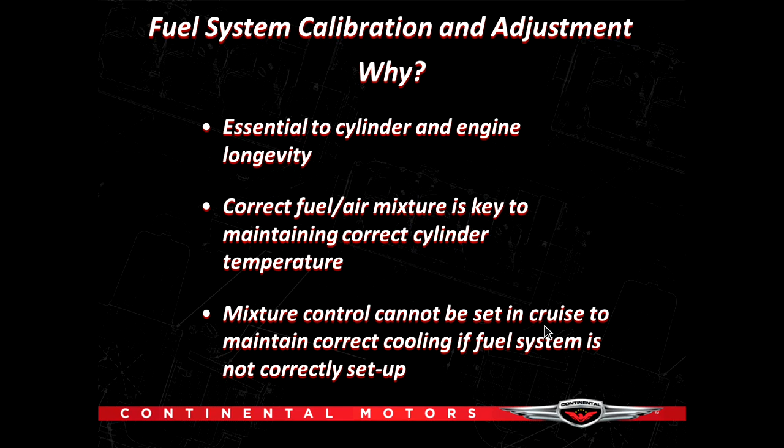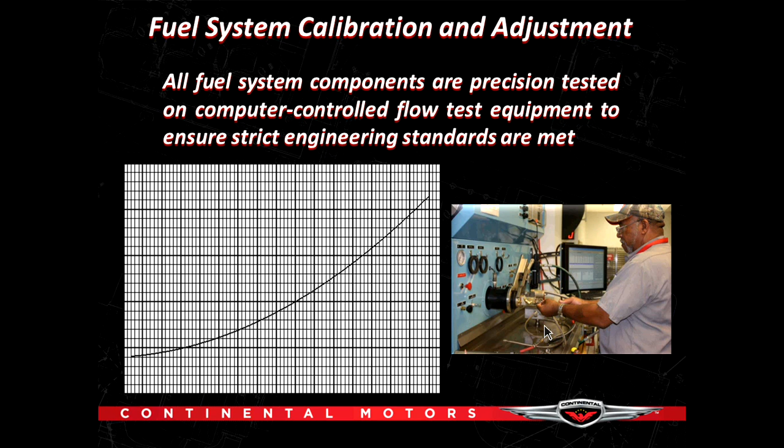Fuel system calibration. Now, during the webinar tonight, you'll hear me reference continentalmotors.aero and talk about our website. All of these documents I refer to in service bulletins and service information directives, you can find free of charge at our website, continentalmotors.aero. So don't feel like you have to write everything down. Fuel system calibration can be found in the latest revision of Service Information Directive, what we call SID.

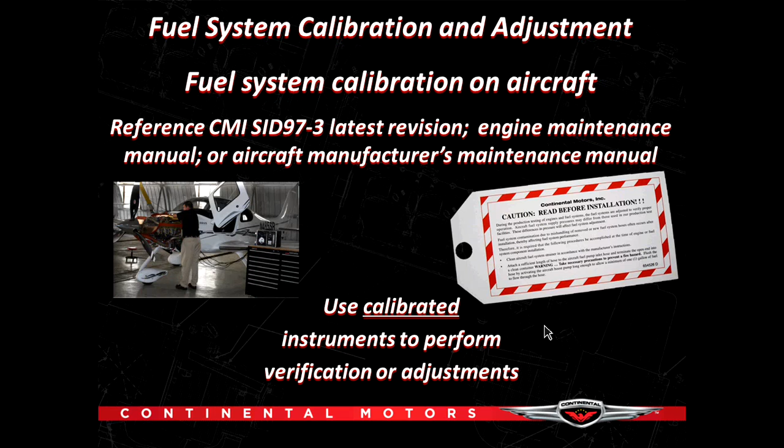There's a lot of people out there in aviation books and periodicals that tell you that you shouldn't clean your nozzles. Continental doesn't know what they're talking about, they say. Well, we believe that we do. We believe that it is necessary for you to clean the nozzles.

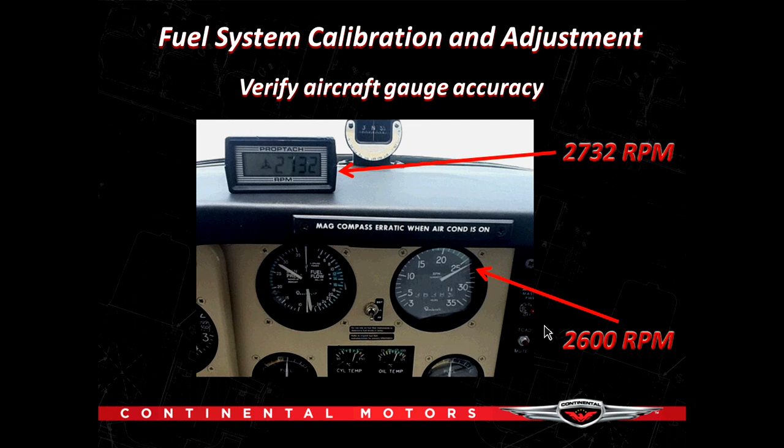I do agree with Mike Bush on one point, and I can say Mike Bush, folks, because he's a friend of mine, and he knows that I pick on him all the time. But Mike Bush says, oh, you don't need to clean your nozzles, there's fluid going through them all the time.

If you've ever looked at an aircraft engine after a period of time, it can get very dirty, dusty, and greasy. And if those screens become clogged, you may not be getting the performance that you need. You could be having elevated cylinder temperatures or lack of performance.

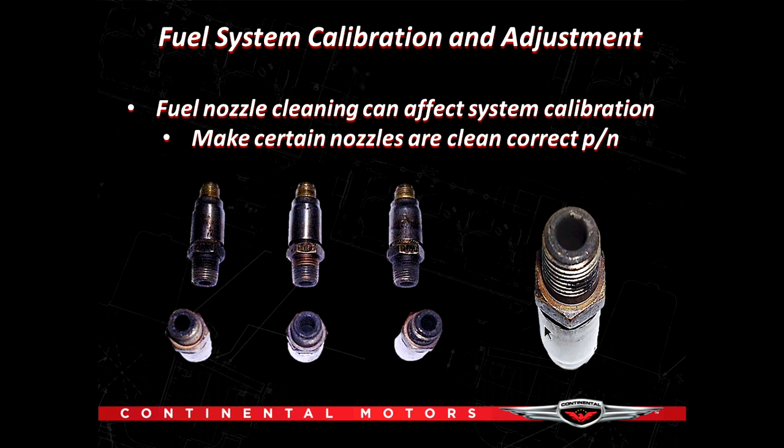Again, where do I obtain the information? Review with your mechanic, SID 97-3, or the latest revision of the Bonanza service manual. If you go to your mechanic and he's never heard of 97-3, or he says that Bill Ross doesn't know what he's talking about, then I would suggest you have a couple of choices.

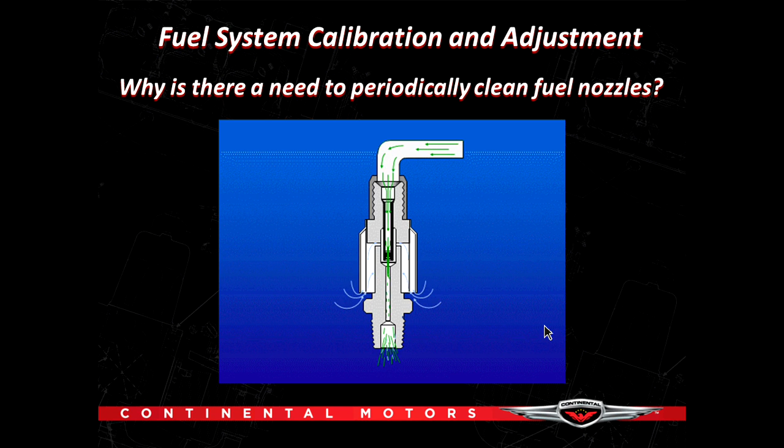One is you can find another mechanic, or if he is your brother-in-law or something like that, in the interest of family harmony, if you want to keep him as your mechanic, then you need to call us here at Continental, and we need to educate him through our school, and we'll be glad to do that. In fact, you as the aircraft owner can come with the maintenance provider, with the mechanic, and we often refer to that as couples therapy.

So make sure that you review that SID 97-3 with your mechanic if you fly fuel-injected Continental. If he doesn't know about that, and he doesn't have the gauges, and he thinks that's not necessary, you need to get in touch with us, and we need to educate your mechanic and get him on board with us.

Very important. Let's talk about oil change requirements and what we can learn from an oil change. A couple of questions you really ought to ask: did you cut my filter and examine it? You need to be looking for particulate in the filter. Has there been any change from the last inspection? And did you make a mess of my engine?

Do you or your maintenance provider punch holes in a filter before removal? Many of you may do that. I know it's becoming a chronic problem because people - it's tight spaces, and we don't want to make a mess. If you're doing that, I'm asking you tonight to please stop, and here's why.

We have worked on many engines in our analytical department where people are poking holes in the filter, and they jam a screwdriver through the filter. It contacts the filter media, it goes into the inlet of the pump, it's sucked into a small passage, and there have been catastrophic engine failures as a result of that because it starves the connecting rod for oil.

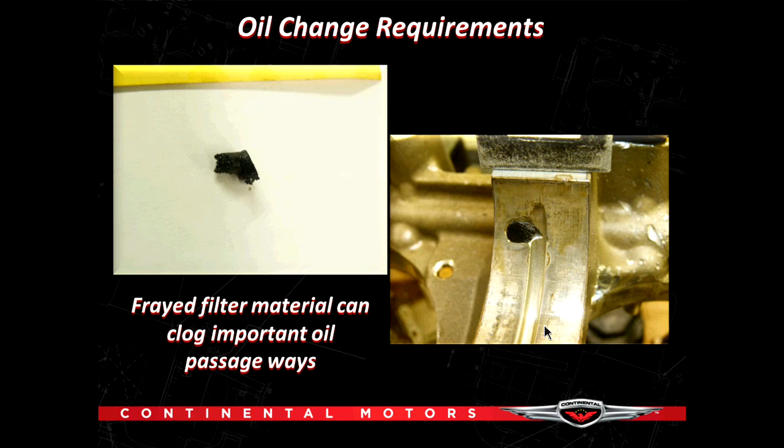In my airplane, I keep a chart of what point in time, what hour, I added a quart of oil. Limited oil consumption is normal. I'm asked all the time, what is about normal? I'd say about average is a quart in 7 hours. What's the maximum? There's a formula based on percent horsepower we can calculate, but what it breaks down to is about a quart an hour.

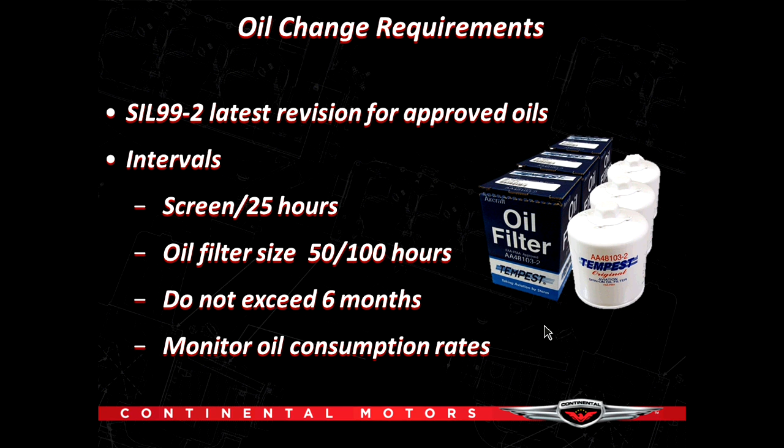Or if you have to stop for oil before you stop for fuel, you're definitely beyond maximum brake-specific oil consumption. But a little oil consumption is good by nature, and the tolerances in an air-cooled engine mean they will burn a little oil. It ensures proper lubrication of the cylinder walls and things like that. Oil consumption can vary from one engine to another based upon its time, its use, and percent power and operating conditions.

Oil filter inspection—you should be looking at that every time. Look at the filter and see what particulate is there. It is normal to have a little material in there. You certainly don't want to be reading part numbers. If you start to see part numbers, you definitely need to ground the airplane.

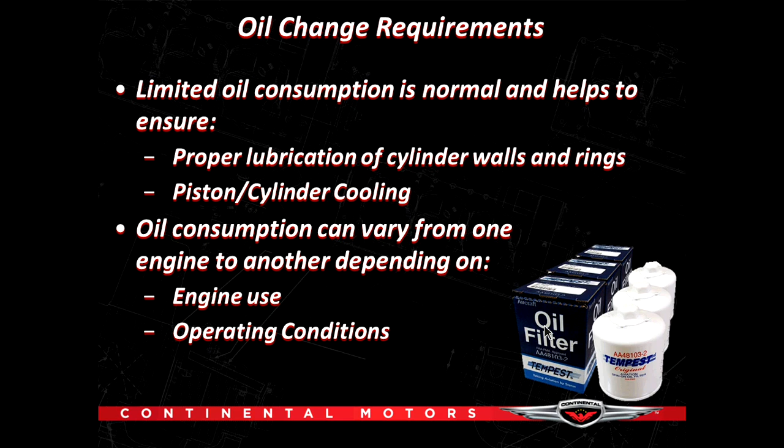If you do find some abnormal wear, a more detailed inspection of what the constituents are in the filter would be required. One way we do that is wash that material into a Petri dish. That dirty plastic container may look dirty, but if you look close at the slide, there's a clean Petri dish in the bottom there, and the technician is washing that filter with a bottle of aviation gasoline, squirting it as a spray and washing those constituents into the Petri dish so he can look at it under magnification. And our safety man is nowhere to be seen with that activity going on.

Then we put it under magnification, and we can find lots of different things just by looking at that—we can see Scotch-Brite, aluminum, dirt. Dirt is indicative of the induction system: do I have an alternate air door rigged improperly, and things like that. We can tell a lot just from the magnification.

If you have an abnormal filter, you can send it to Continental Motors, and we will look at it free of charge, whether your engine's currently under warranty or not. Just call us at the toll-free number and we'll send you the paperwork to send it in. There's no charge for it. We'll look at those constituents, wash your filter into a clean Petri dish, and examine that. If your engine's on oil analysis, you need to stick with the same oil analysis company at the same regularly scheduled interval and look for spikes or relative changes over time.

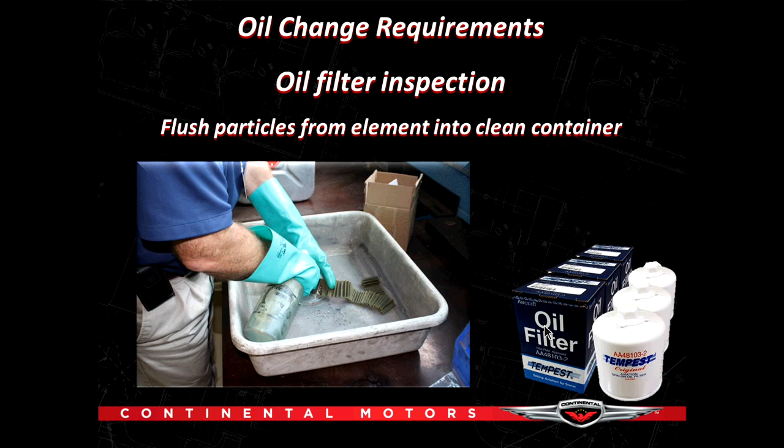If you do see an increasing trend, then we need to be very thorough in our inspection of the filter contents as we go along.

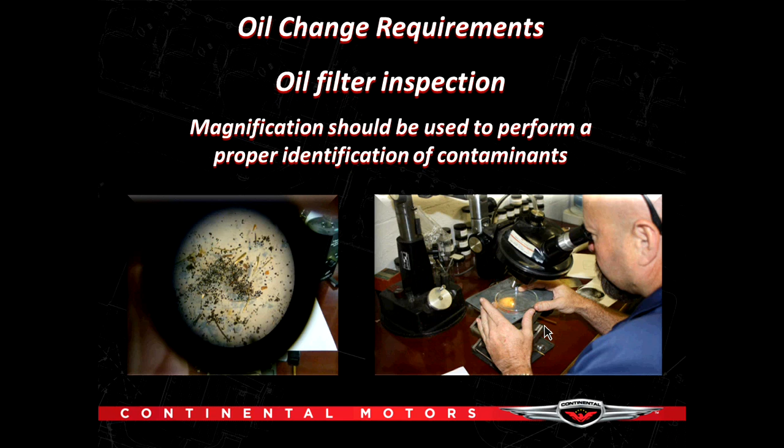Okay, cylinder compression tests. I guess we're running okay on time, but I'm going to talk about cylinder compression tests and probably change some of the ways you're thinking. First of all, should I be concerned if my compression drops below 60? Did you perform a borescope inspection? And did you perform the compression test in accordance with Service Bulletin 03-3? Believe it or not, there are a lot of people out there that do not adhere to Continental's bulletin on performing the compression test.

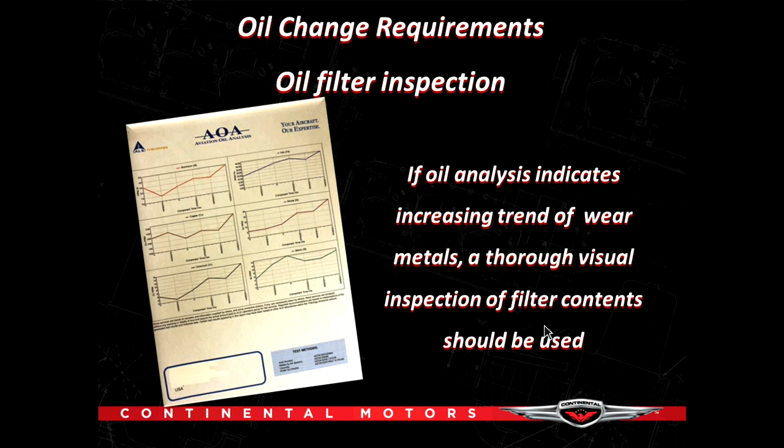Let's talk about the compression test and what it means. In my opinion, the compression test is an absolute bogus test. It doesn't tell us anything about internal engine health. It doesn't tell us about performance. It doesn't really tell us about wear, because it's not representative of what's happening in the engine under the dynamics of combustion. We're putting 80 pounds of air in the cylinder and reading a differential pressure, and that really has nothing to do with horsepower or anything like that. It is a bogus test.

There are some better tests I'm going to talk about in a minute, but the purpose of performing the test is to find the leak source, and that's really all the compression test tells us—is it leaking from the exhaust system, through the intake, or out of the breather? If it's the exhaust, it's coming from the exhaust valve. If you hear it in the intake, it's the intake valve, and if you hear it in the breather, it's blow-by past the rings.

The procedure for performing the compression check is contained in the latest revision of Service Bulletin 03-3. To do that, you have to understand the function of the master orifice tool, and whether 60/80 is the real standard. That's very important, folks.

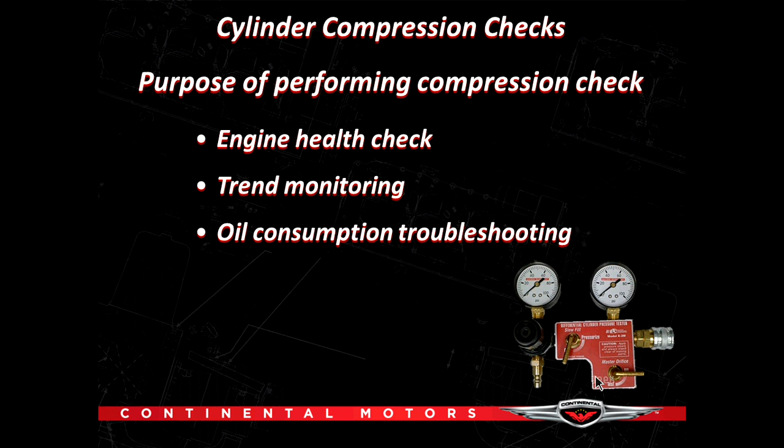60 over 80, everybody thinks, oh my gosh, the compression's 59, 58, the world is ending, and I've got unscheduled maintenance. That's simply not true. Years ago at Continental Motors Engineering, we ran engines with falling compressions on dynamometers to see how low the compression would have to be before you could measure an infinitesimal change of horsepower. Believe it or not, the compressions are very, very low before you can detect a small change. We referenced that area of compression and that's how we came up with a master orifice tool.

That's a calibrated leak, and your mechanic must establish that leak limit prior to the test using a master orifice tool. He sets 80 pounds of air on the gauge, flows it through the master orifice tool, and reads the leak limit on the other side. Then he's done with the master orifice tool and can perform the compression test. My compression tester, if I checked it, usually reads somewhere between 40 and 42. If the leak limit is 40 and I get a compression of 40 and your engine borescope is fine, I will return that engine to service.

The borescope inspection is much more indicative of what's going on in the engine than the compression test. Let me go back one slide here. The 60 over 80, I want to explain where that 60 came from.

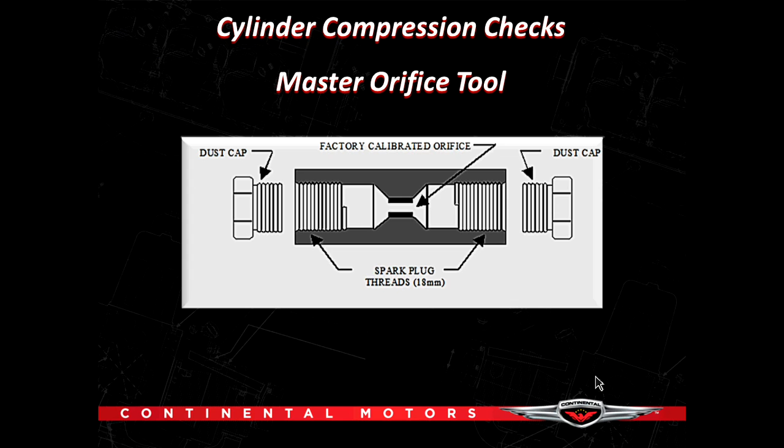But going back to the borescope inspection, which I think is more important than the compression test - and I'm not telling you to disregard the compression test and not do it. You still need to do it.

But the borescope inspection, that's really going to tell your mechanic about internal cylinder functioning. He can see scoring, he can see metal transfer, he can see oil puddling. With training, he can look at the carbon deposits and tell, well, this guy runs lean of peak, this guy doesn't lean at all, this guy probably runs best power - that type of thing. You do so by looking at combustion deposits, intake and valve condition. This is all very important.

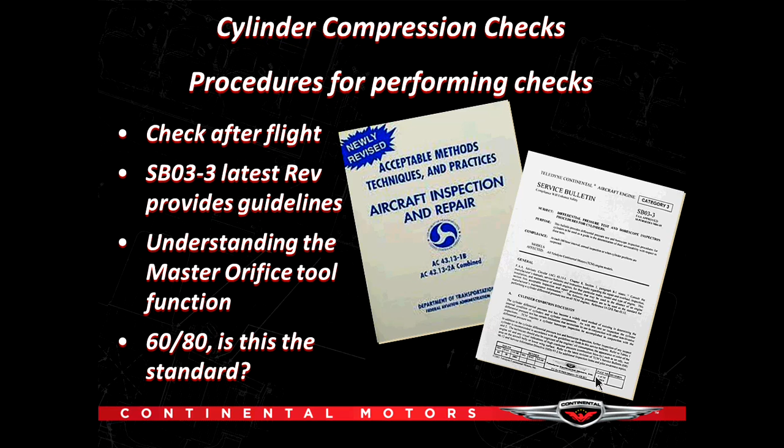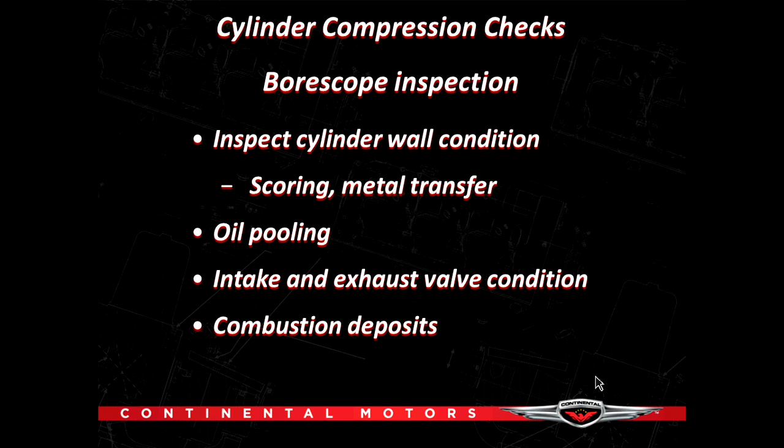So again, borescope inspection tells us a whole lot about internal cylinder functioning rather than the compression test, so make sure your mechanic is using that. Again, it's SB03-3. You can go to our website and type in a keyword, compression, and you'll see that pop up.

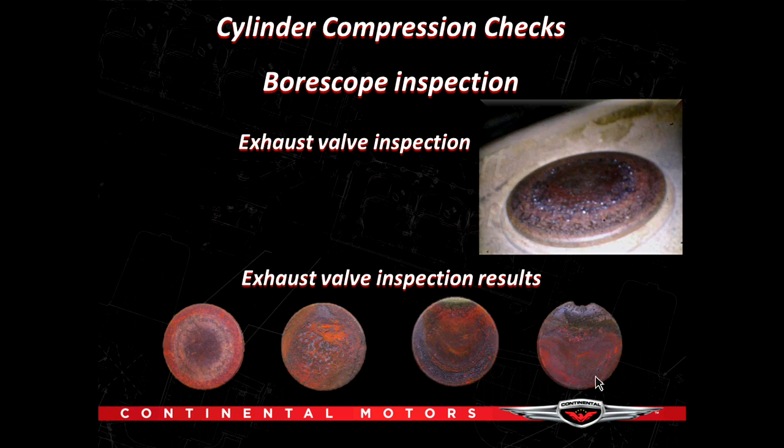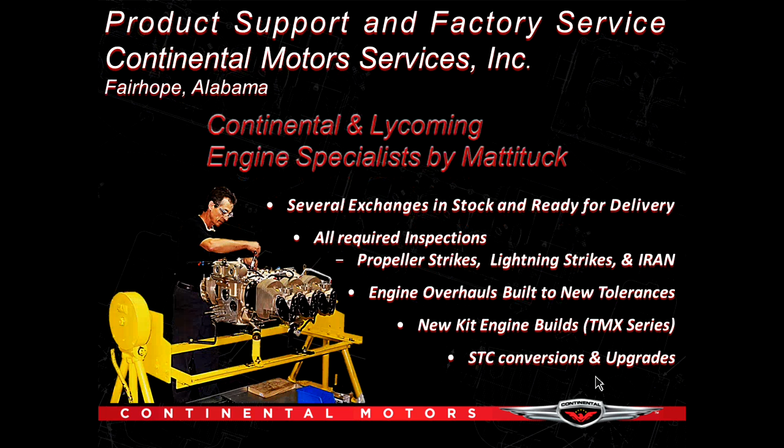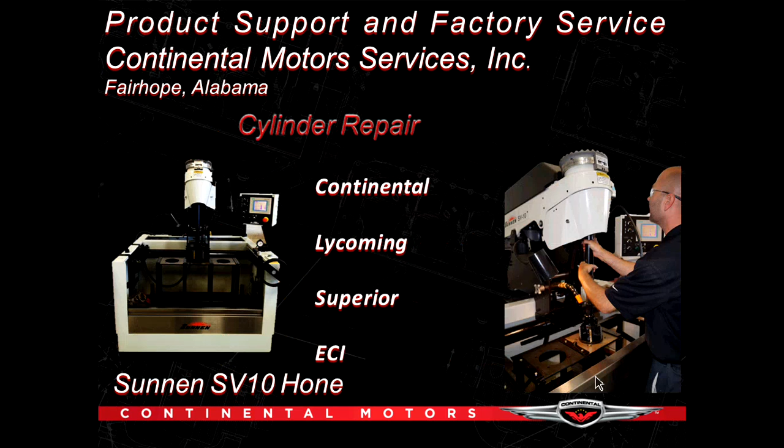We also provide avionics services, so we are a true one-stop shop for retrofits, upgrades, and repair. We can do just about anything with regards to any avionics. Most manufacturers, with the exception of Rockwell Collins, everything else we handle - radars, transponders, and the whole bit.

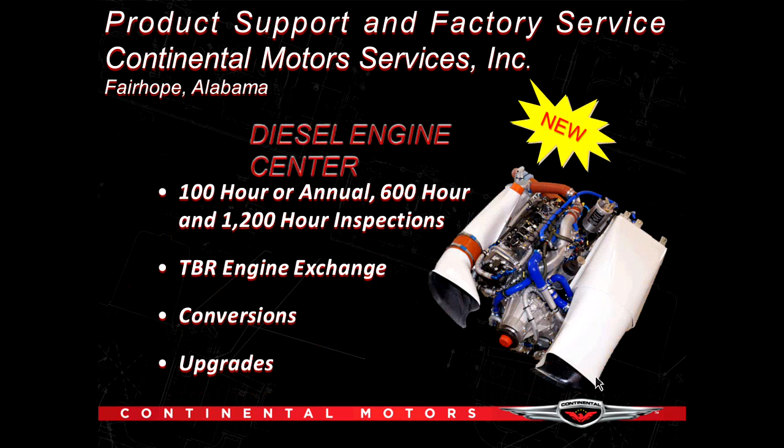You can also buy engines factory direct at that number, 877-777-1870. Lycoming, Continental, overhaul, rebuilt, your choice - we can handle that for you.

Also, we're your in-stock source for parts, airframe parts, Continental and Lycoming, ignition systems. Many of you may not know, but the Bendix ignition systems line, Continental has been manufacturing since 1987. So if you hear the word Bendix, TCM, or Continental Mag, it's made right here at a factory in Mobile, Alabama, and we can support both Lycoming and Continental.